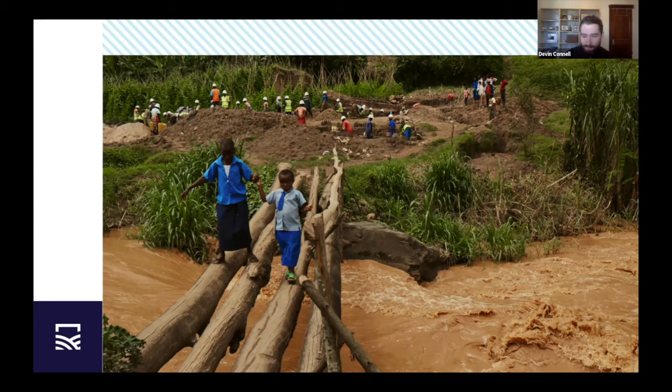day. Again, most of us now are starting to have a hard time having our kids walk a couple blocks to school on their own, for better or worse, in the US. So, you could only imagine what it's like for these families as they send their kids across these types of structures day in or day out. Or how about this is how you got to the market every day?

Now, for me, this photo really speaks to why we do what we do. If you look in closely here, this bridge is actually made out of barbed wire. The suspenders, if you can call them that, the main cables, if you can call them that, the ties on the decking, it's all made out of barbed wire. And this really speaks to the need communities see for these projects.

So this is an example of a community in Nicaragua that wasn't able to get the support on their own from local NGOs and the local government, and so actually took it into their own hands to build this bridge. We then worked with this community to replace this with one of our structures years later.

Or finally, take a look at this photo. Now, I don't know about you all, I've got a lot of good friends, but I don't think I'd be trusting them to hold each side of this rope as I climbed across. But unfortunately, this was the reality for this community in Ethiopia for decades.

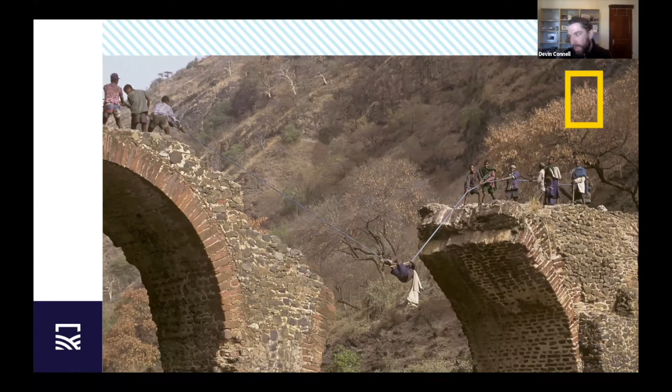This community actually destroyed this structure on their own during a war to keep out the opposing forces from entering their community, and had to live with that for several decades until this photo was put in National Geographic and is actually the founding story for our organization. Our founder saw this photo, said, hey, I think there's something we can do about it, and went and put this bridge in their place.

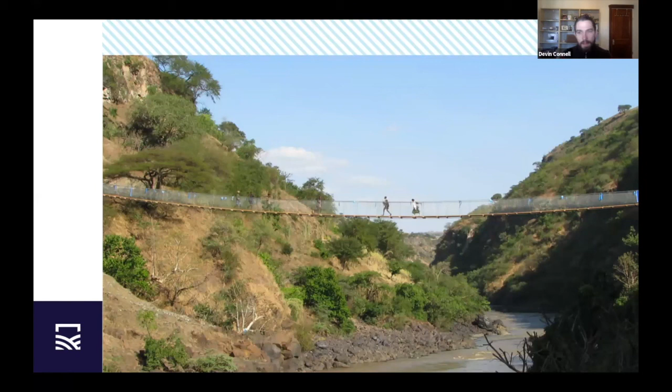Now, there's a reason why we didn't just stop at that bridge. We went from there to grow into what we are today, almost 20 years later. And this is a big part of that reason. The World Health Organization actually estimates that 1 out of every 7 people in the developing world lack safe transportation access to essential services. That's almost 1 billion people in the world who can't get to where they need to go on a daily basis due to infrastructure.

But why footbridges? Infrastructure is obviously a big thing. There's a lot of different factors at play there. Well, we focus on footbridges for a lot of reasons. A big one is 1 out of every 7, that roughly billion people around the world, the majority of them live in walking communities.

So if you go to one of our communities in rural Rwanda or Uganda or Panama or Nicaragua or really anywhere around the world, you'll see that there aren't roads in these communities, there aren't cars, there are footpaths, there are motorcycles, and there are cattle of different sorts. Their reality is a walking reality. And so the investment you put in for vehicle infrastructure oftentimes isn't realized in a reasonable enough time span compared to the much lower investment you can put in for pedestrian infrastructure.

A study that was actually done by the University of Notre Dame and Yale showed pretty remarkable results on our projects in Nicaragua. Really, one of the big ones here I want to point to is the 30% household income increase. It really blew us all out of the water. It was a pretty staggering impact that we didn't necessarily expect. And when we saw that, we said, we knew we were in the right direction before, but now we definitely

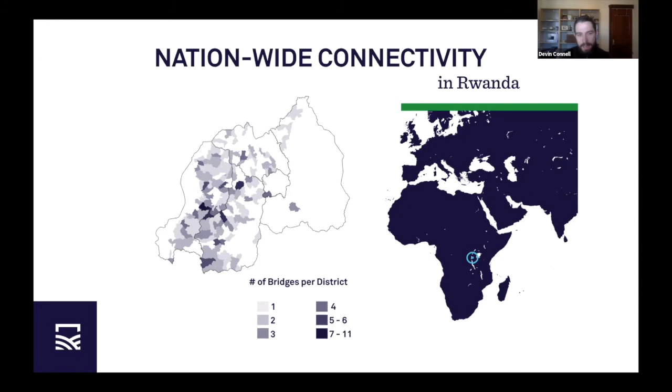Again, that was rapid fire, but I want to leave a lot of time for Nico to dive into design. So if you have any questions on the general background on our organization, why we do what we do, what we're doing in Rwanda, jot them down. If we don't have time at the end, you'll have my contact information and we can connect afterwards. Always happy to talk more about it.

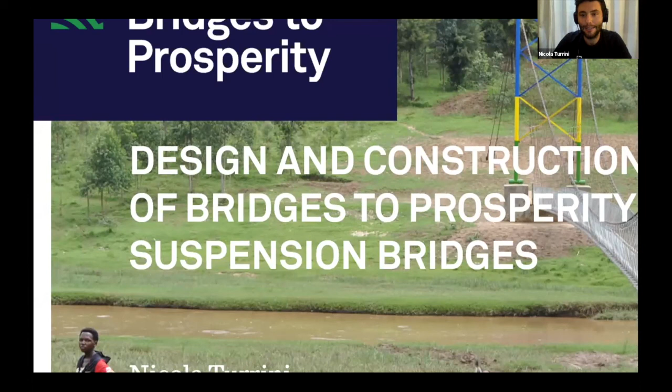I'm Nicola Turrini, and today I'm going to walk you through the main aspects of the design and construction of B2P suspension bridges, which is one of the 2 types of bridges that we do.

But let's start with a short and personal introduction, as Devin did. As you may suspect from my name, I grew up in Italy, in a beautiful town called Modena, where I completed my bachelor's degree in civil engineering and my master's in structural engineering. During my master's, I got a European scholarship called Erasmus, which gave me the chance to move to Madrid, Spain to work as an intern for an engineering firm. That was the start of a long 3 years in which I had a lot of fun, but also got a lot of experience in bridge design.

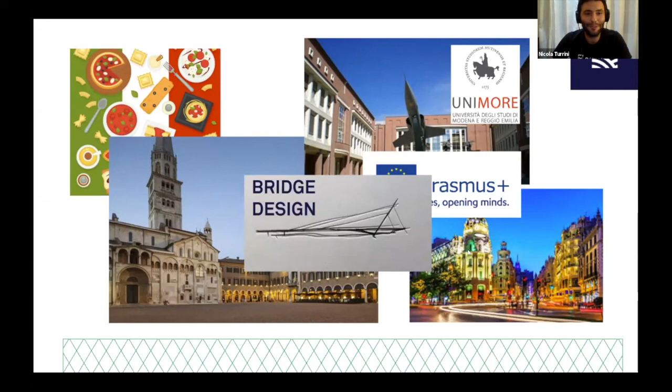In 2016, I took what seemed at the time like a crazy step of leaving my job in Spain and applying as a volunteer for Bridges to Prosperity, ending up being sent to Nicaragua, flying to the other side of the ocean for the first time, and having a lot of hands-on experience working on building cable bridges with my own hands for 9 life-changing months.

Thanks to my engineering background, I then made it into B2P. In 2018, I got the opportunity to move to Rwanda to help grow our local engineering capacity. Until the end of last year, 2020, I've been working for the Rwanda program as engineering manager, focusing on surveying, design, and quality control for all the bridges built in Rwanda. I now moved into a marketing role, bringing my technical experience with me, and that's why you see me here today in this webinar.

But what do we actually build in Bridges to Prosperity? We build cable bridges, structures characterized by light walkway systems that permit this kind of structure to span across wide valleys with no need for mid-span supports, and assure moderate dimensions also of the substructure as well.

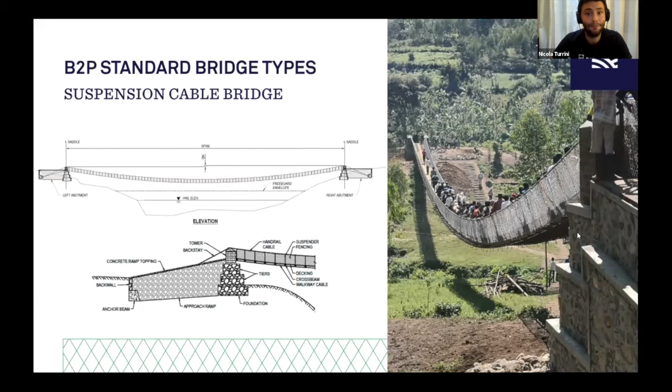We have two main standard bridge types. The first one is the suspended bridge, which is more of a hammock type, the kind of bridge that you find in movies like Indiana Jones.

The suspension bridge is the other type of bridge, which is more iconic, similar to the Golden Gate Bridge that all of you should know pretty well, as long as we are also in California right now, if I'm not wrong.

Here the main cables hang from taller towers, and the walkway is actually upward in order to improve the clearance below the bridge for flatter river profiles, like the one normally found in floodplains. Concrete pedestals are below the towers and transmit the load to the footings below, and an anchor, a deadman anchor type, is in the back, anchoring the main cables.

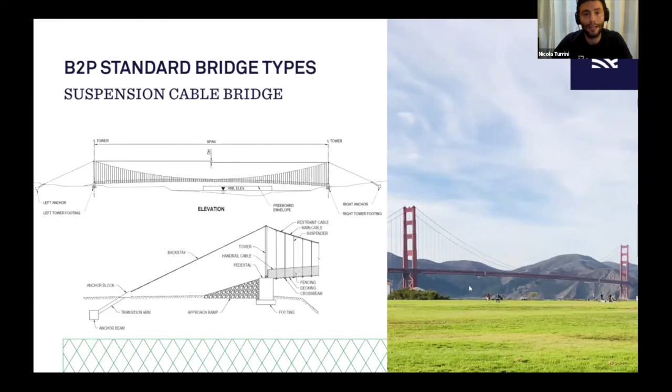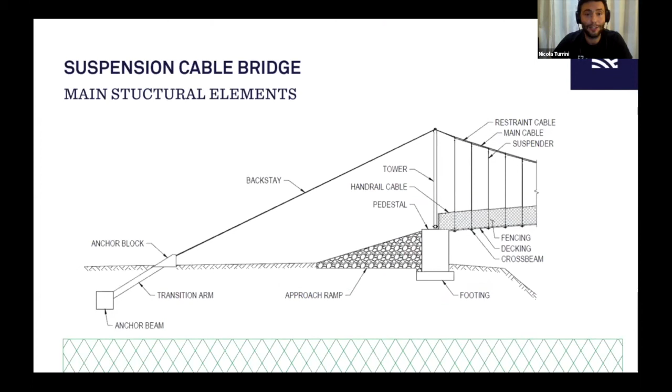This presentation is going to be especially about suspension bridges, so we're going to refer to this representation more than one time. I'm not going to stop right now, but we're going to go back to that.

We can start now with a brief overview of what it takes to pass from selecting a site to having a trail bridge built there, following our general steps.

In particular, the Rwanda program as an example, where a comprehensive assessment of need for pedestrian footbridges was undertaken in 2018 across the entire country.

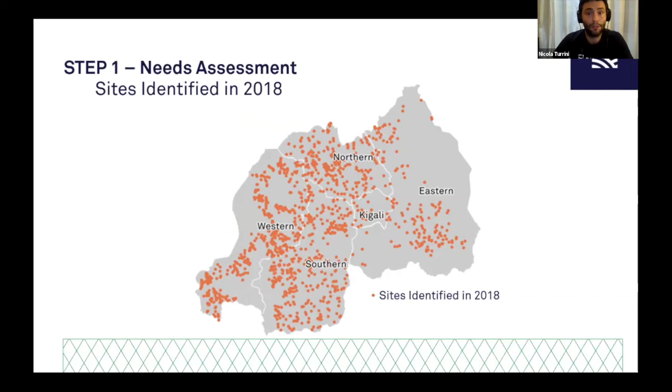Each assessment was then post-evaluated by the engineering department I was working in, in order to decide if each site was technically feasible or not for a B2P bridge, approving in this way around 300 sites out of almost 1,500 sites total.

Once the list of approved sites was ready, our research partners worked on a randomized order to be followed for the construction of our bridges in each district, basically a randomized controlled trial study. These were like Notre Dame and Yale, and I think also University of Colorado. Correct me if I'm wrong, Devin.

Each year, the same list is followed to decide which sites to survey in each district in order to design and build the bridge there.

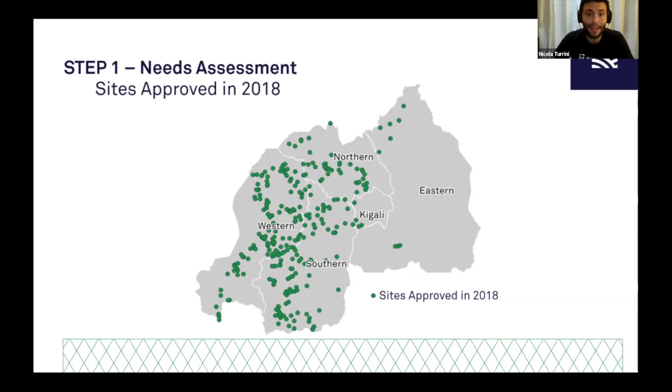Once the site survey visit is scheduled, our surveyor will get in touch with district and community representatives to plan the visit. Once on site, a bidimensional survey is carried out with a total station to define the profile of the riverbed along the line, which is selected by the surveyor, following criteria that we're going to see in the next slides.

Once we have the deliverables of the survey, which are topographic data, photos, videos, GPS coordinates, and geotech evaluation, all of this data is then used to design the bridge to be placed there or to reject the site.

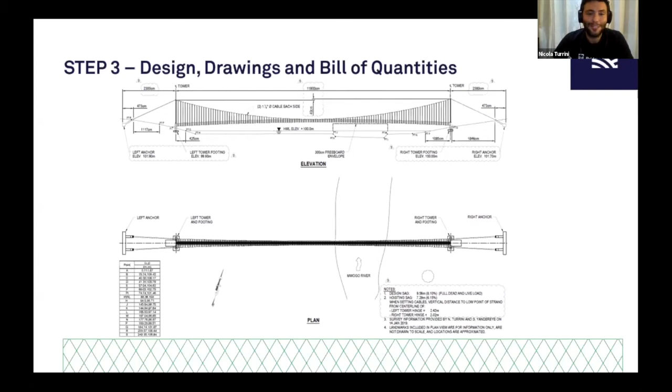A set of technical drawings and a bill of quantities, as in every engineering work, will be created based on the design. Once the drawings and the bill of quantities are ready and approved by the district, a bridge can be constructed with our construction team, and finally inaugurated and open to the public.

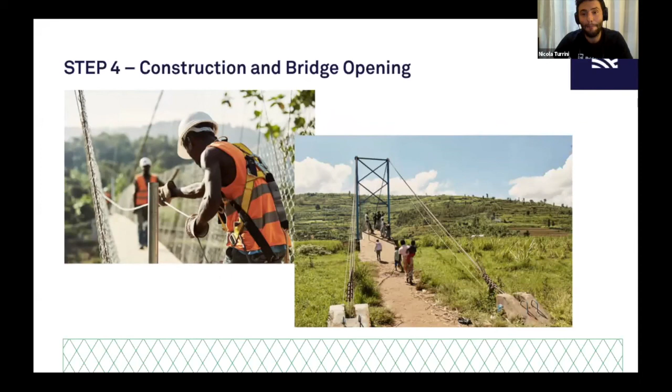Before diving into too much detail about main design parameters, let's start with some basic definitions that may not be completely familiar if you're not specifically working with cable bridge design.

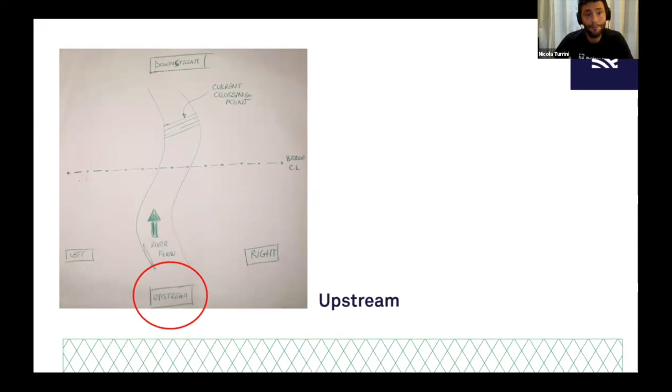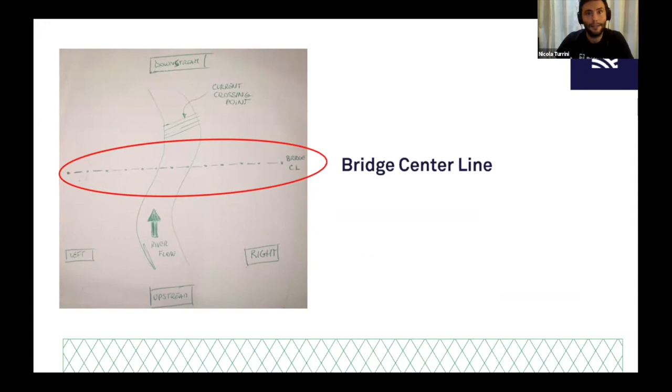Once the site is selected, the river flow direction will define the names of the different areas around the bridge, starting from the upstream, where the water comes from, and the downstream, where the water flows to. This defines the left side of the bridge and the right side of the bridge, and finally the center line, which is the imaginary line that goes along the initially taken survey and along which the bridge will be built.

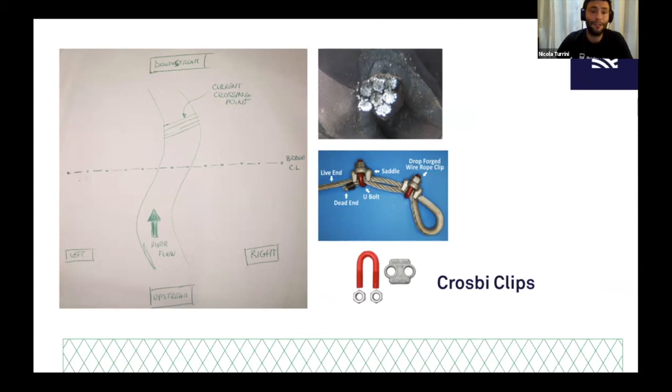Then I'm going to define the Crosby clips, which are devices composed of a saddle, a U-bolt, and 2 nuts, and they are made to clamp the wire cable to themselves, as you can see in the picture, and they're used like in the anchors of our bridges.

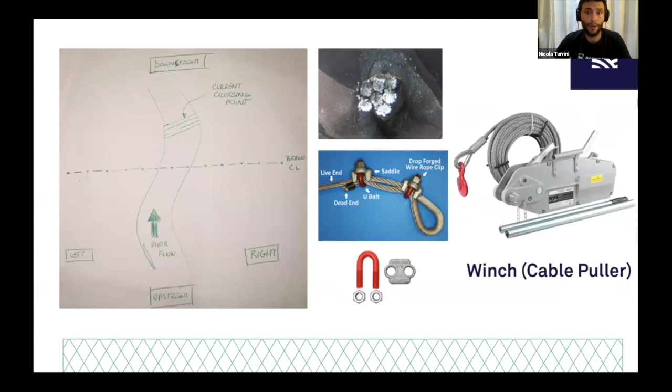And then we have a winch or cable puller, which is a manual pulling device used for operations like tower lifting or cable hoisting, as we're going to see.

And now, as promised, let's see the main parameters taken into account for the design of our bridges.

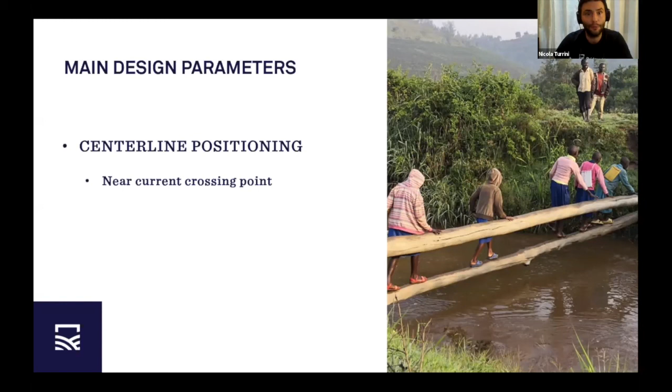Firstly, the bridge needs to be built near the current crossing point for social reasons. If you build it far from it, people could decide not to use it and keep crossing in the same old point and in the same old risky way, which you can see in the picture.

Then free and safe areas for both abutments and footings need to be available along the chosen center line. The quality of soil, of course, needs to be assessed and approved on both expected positions of the footings.

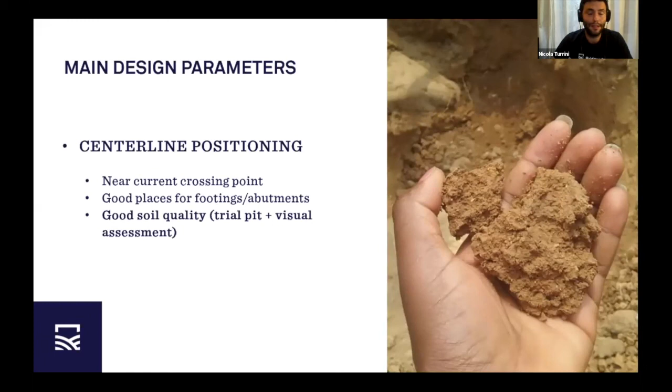And once located, possible position of the towers of the bridge, an adequate backstay distance needs to be surveyed in order to accommodate possible increase of design span in a second time.

The height differential between the 2 sides of the center line needs to be kept in a limited range in order to have a design that is possible and efficient.

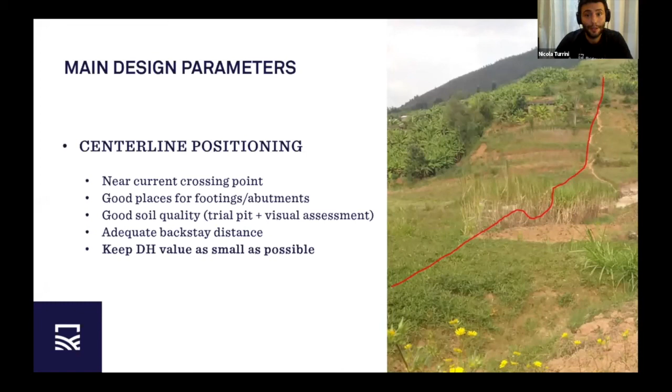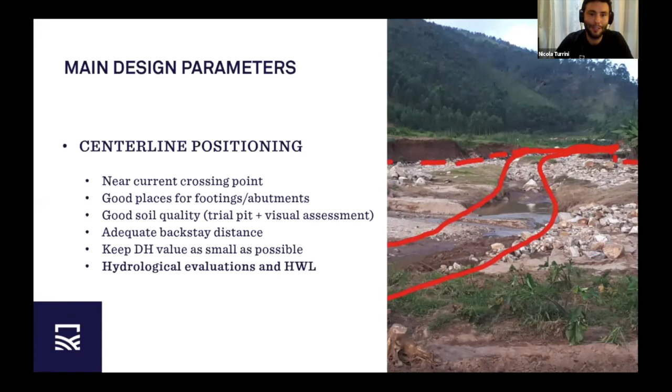And finally, we have the main question mark, which is the history of the river, the hydrological history of the river, which we can explore in the following points.

We can start with the status of primary and secondary banks, which is really indicative of the recent and past history of the river, giving us a first idea of how much setback is needed for the 2 footings.

Then the upstream river shape will also be really important to be studied. An initial 50-meter span proposal, which could be this one in this case, could have to become 100-meter plus, just because the upstream meander, you can see here, could be expected to push little by little with erosion across the center line in the years.

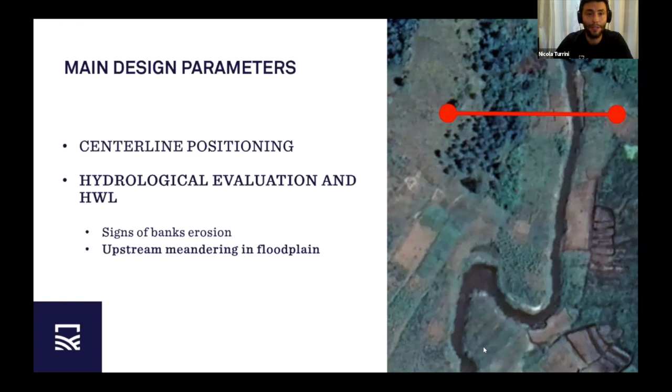We're not talking about something that happens overnight. We're talking about something that could happen in years, and we need to foresee that. Also, upstream confluences need to be avoided as much as possible, as those are areas in which the riverbed could move across the entire valley during individual flooding events.

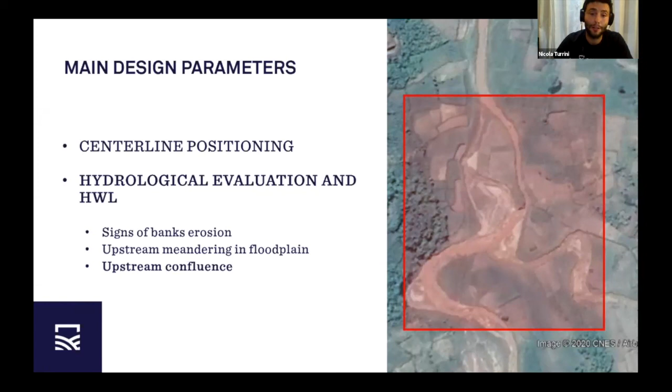And the high water level, it's probably the most important technical information to be collected from the community people, I would say, in particular from the elders of the communities, because it will geometrically define the needed height of our walkway.

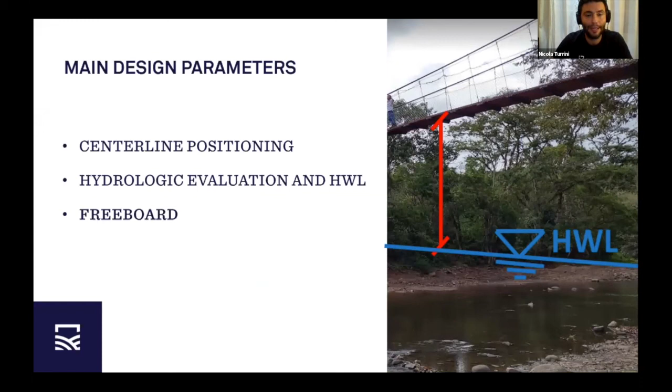Knowing the high water line, a freeboard value will then be defined to be respected by the design, and it goes between 2 and 3 meters generally for our designs.

And as said, all of these considerations will be taken into account in order to decide where to place the footings with respect to the banks of the river.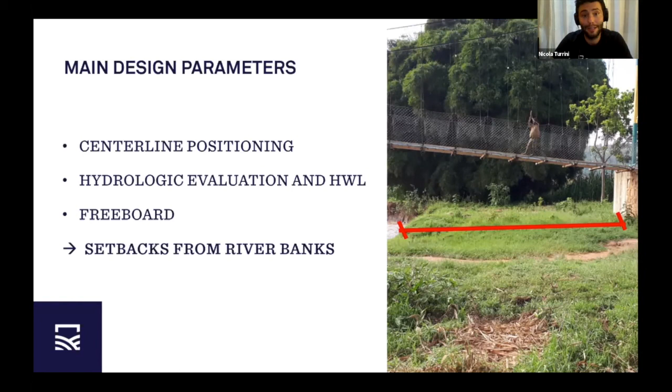Let's now start diving a little bit more into the bridge design, looking at the main structural elements, starting from our foundations, which are made by footings and pedestals.

The 2 concrete pedestals transmit the load coming from the top steel towers onto the footing, which is below them. And the footing obviously spreads it to the ground as a foundation.

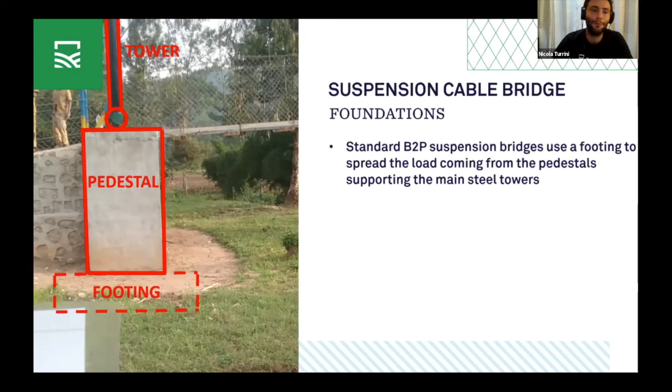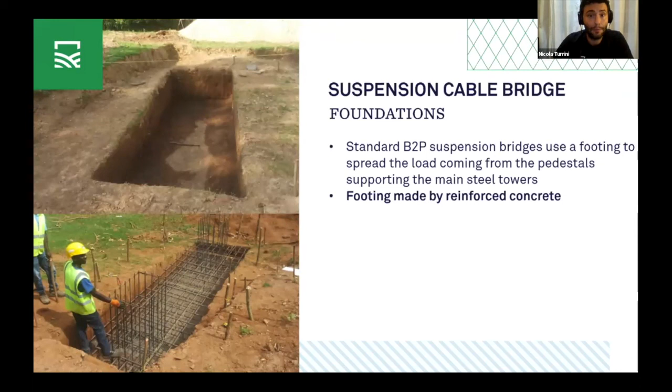The suspension footing is a reinforced structure generally designed at 1 meter depth, so really shallow. It does involve a really simple excavation, and the rebar cage is then assembled inside of the excavation.

And after a quick quality check on dimensions, orientation, and rebar position and number, the concrete is mixed and poured. All concrete designs for B2P bridges consider a compressive strength of 10 megapascals.

So basically like pizza dough, in order to account for the poor quality of the hand mixed concrete used on our site. And that gives you the idea of the safety factors that we involve in our designs.

Once the footing is casted and ready, pedestals are going to be built on top of it. Masonry or CMU perimeters are built around the assembled rebar cages, and eventually a first stage of concrete is poured using the same wall as formwork, as you can see in the pictures.

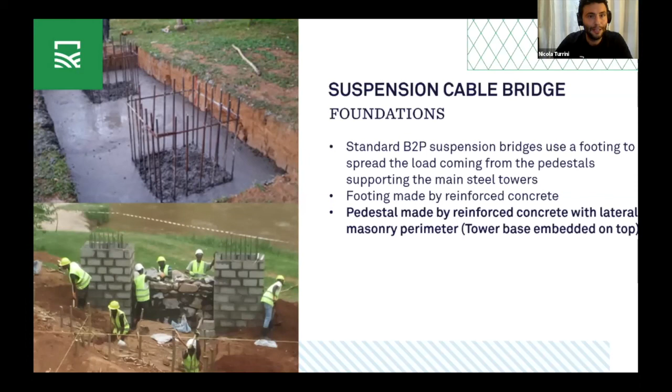Once the first concrete stage is finished, then on top we're going to place the base of the towers and an extra reinforcing cage, and then pour a second and final concrete layer.

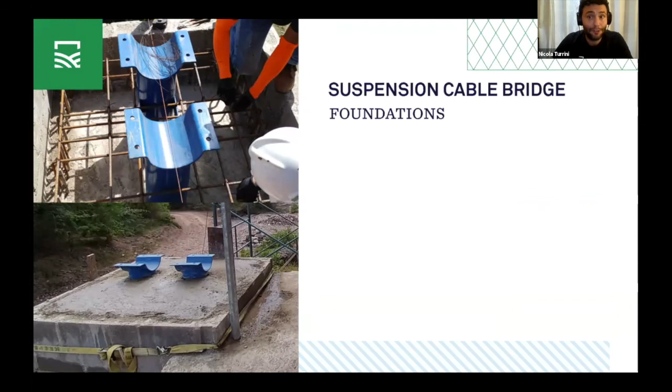One particularity of our suspension bridges is that the base of the steel towers is hinged. This means that the loads transmitted to these pedestals are going to be mainly of pure compression, and that the bearing pressure below the suspension bridge footings is checked and limited depending on the quality of the soil, of course, as every foundation. Flexural and shear capacity of the footings are also checked, and the pressure in particular is calculated using the equivalent width method, which some of you are probably familiar with here, if I'm not wrong.

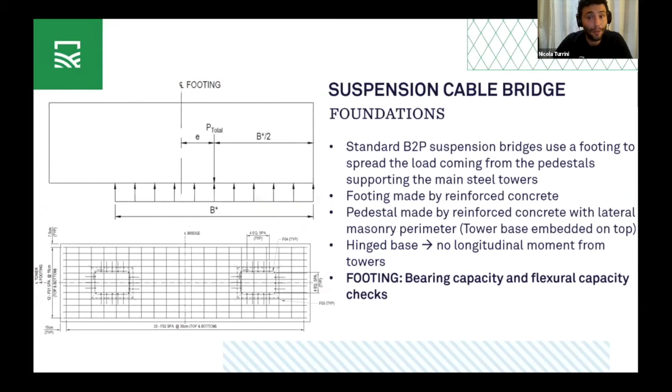As said, the dominant check for the pedestals is compression verification, as the bottom of the towers is hinged and not able to transmit longitudinal moment, and then a transversal moment from the top of the tower will be transmitted in terms of a couple of forces, one of traction and one of compression in the two pedestals.

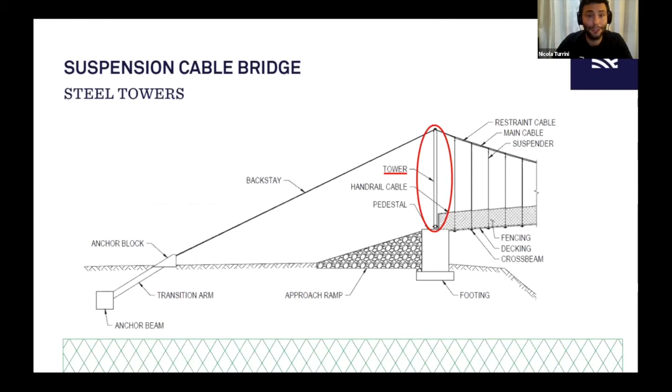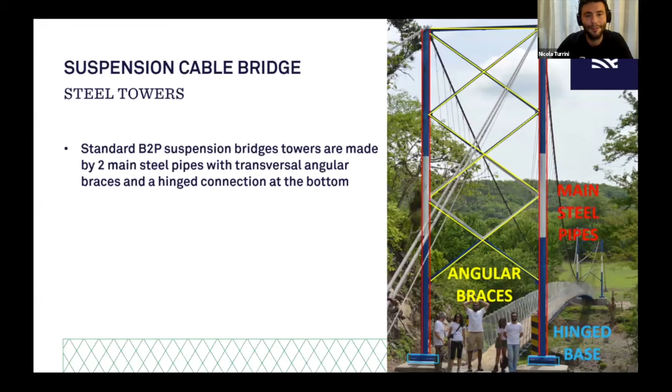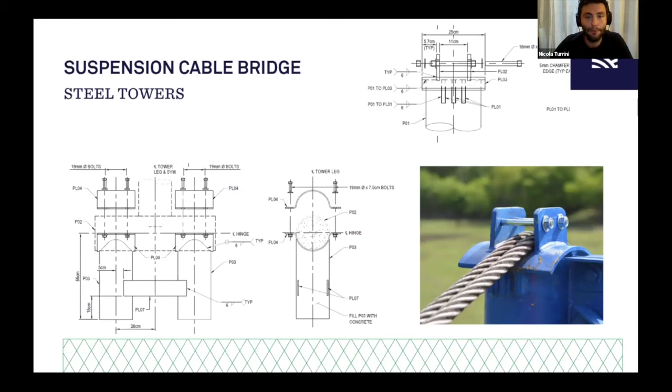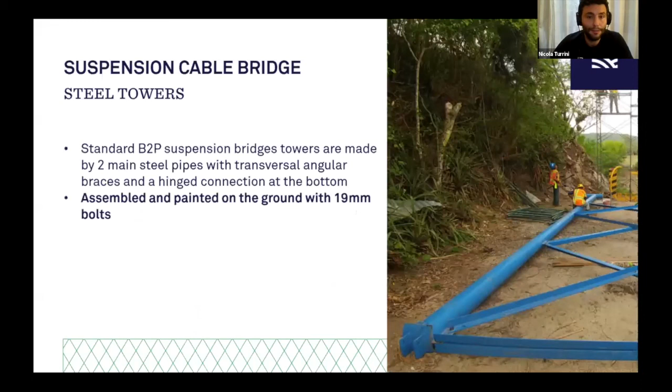The suspension steel towers are assembled on the ground, and after placing the base of the main pipes in position on the pedestal, you can start connecting the X braces with bolts and then paint the tower. As you can see here, we're in Nicaragua, so it's blue, white, blue as the Nicaraguan flag. Then a temporary scaffold is erected in front of the pedestals and secured with lateral guy cables. And there will be a pulley system on top, supported by a timber frame. A lifting cable is passed through the pulleys, secured to the towers with slings, and eventually connected to...

Are you guys able to hear me yet? Well, I just got the message that my connection is not good. Can someone confirm? Yeah, we can still hear you, Nico. Okay, good, fantastic.

So I was going to say that the lifting cable is passed through the pulleys, secured to the towers with slings, and eventually connected to a cable puller, the winch that we talked about, to the other side of the scaffolding. A good anchor point then needs to be found or created in order to connect the other side of the winch. This will generally be a concrete block cast on site, as you can see in the sketch.

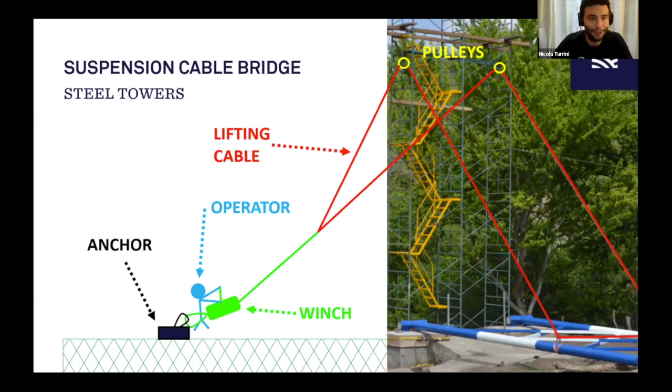The suspension steel tower lifting is one of the most dangerous steps for the construction of a B2P suspension bridge. A lot of things could go wrong, and all the danger zones and the escape routes indicated in the sketch need to be delimited and evacuated. And good communication needs to be assured between the team that is pulling at the winch and the team that is checking the tower lifting at the tower position.

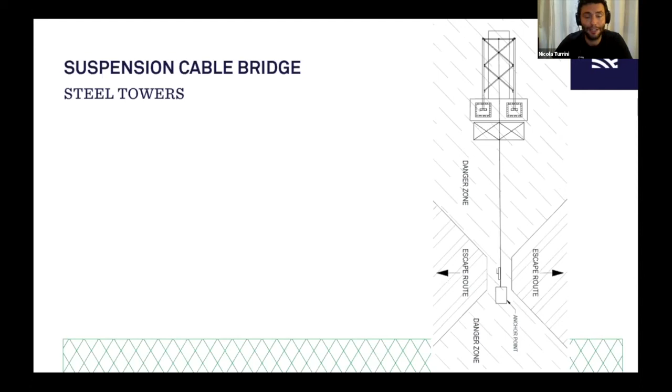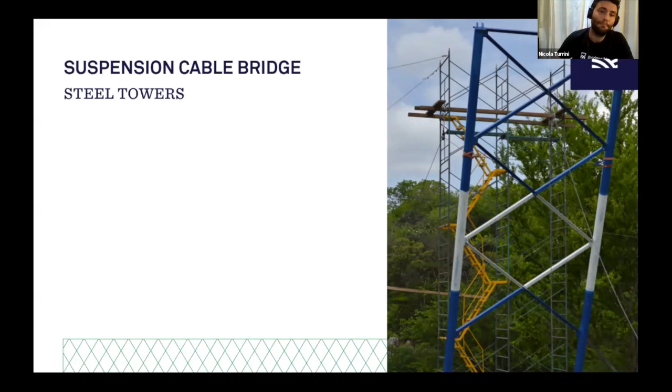And once everything is ready and the winch is set, then the hard work can start, and someone will start doing some good 15-20 minutes of rowing machine, little by little, lifting that heavy tower. And once it starts raising, it will be rotating around the hinge connection at the base, and it will hit the top timber structure, which will stop it with a precise cant, and the tower will then be secured with slings to the scaffold in order to be sure that it's not going to fall back. And finally, the bolts at the base of the tower will be secured as well. The inner part will be greased.

Sorry, there is just someone with the microphone open. If it can be muted, it would be great.

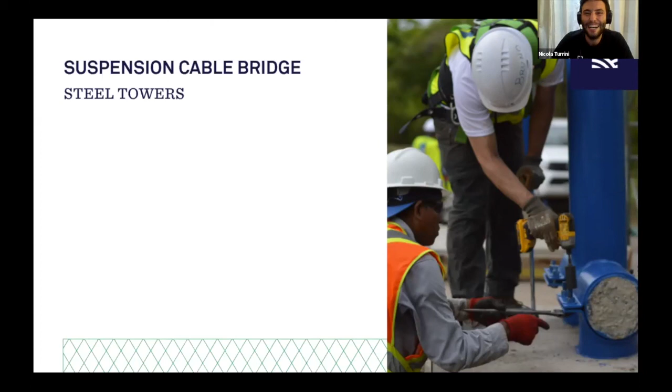Fantastic, thank you so much.

Structural analysis of each standard tower height has been run and parametrically studied in order to define optimal span ranges for them to work well both structurally and geometrically. So it's already been done at the beginning, and the calculations need to be rerun only if the specific tower that is used is going out of its optimal span range.

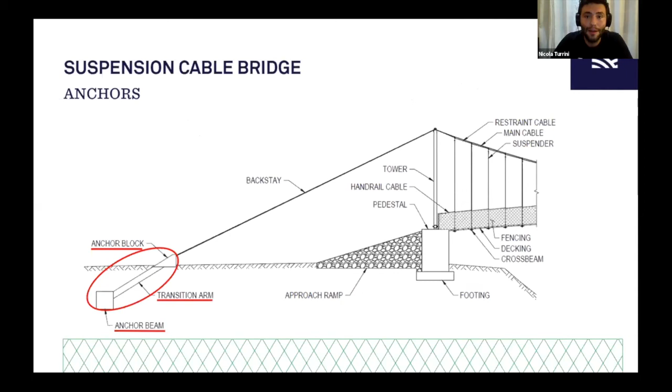And now let's pass to the peculiar anchor system of our suspension bridges that I mentioned. It's going to be an anchor beam, a dead man, we call it, underground with anchor blocks and transition arms. And as we're going to see, the main anchor beam in red is the main resistive body, and the transition arms in yellow transmit the load from the main cables to the anchor beam. And the anchor blocks in blue are the only part of the system out of the ground, with an embedded steel pipe as an anchor point for the main cables.

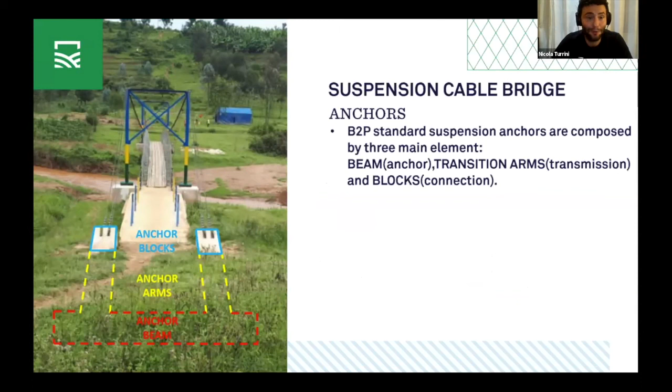The anchor beam is normally 3 to 4 meters deep in the ground, and that makes the excavation for suspension anchors generally massive. I say massive because we don't use excavators, we use hand excavations, as our general sites are very rural, very remote and difficult to access. This means that safety measures like grading the excavation with 1 meter steps, shoring, or building protective barriers with handrails around the excavation are always applied in B2P sites.

The anchor beam rebar cage is first assembled on the ground and then lowered to the bottom of the excavation with a rope system. Then the anchor arm cages are assembled and positioned, and finally also the anchor blocks once they are assembled too. Then beam, arms, and anchor blocks are cast in 3 different stages in order to make it easier for the construction team to deal with the formwork.

The most important reinforcing elements for this kind of anchor are for sure the longitudinal bars embedded in the transition arms, because those are the ones that transmit the load coming from the cable anchored to the pipe on top to the beam at the bottom, which is the main resistive body.

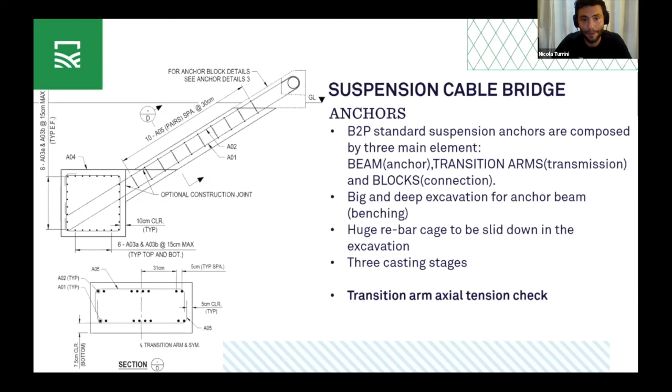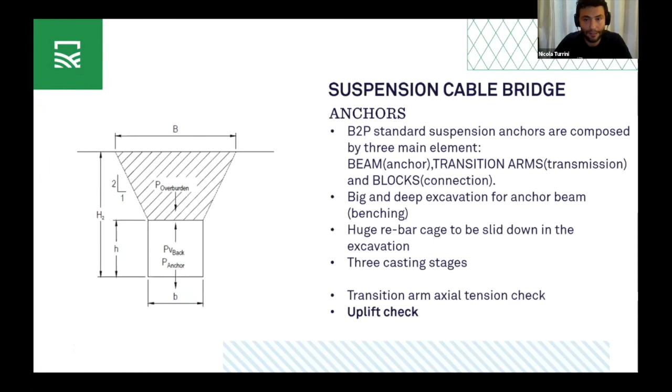And then there will be the uplift check of the anchor beam, which relies on the weight of the overburden soil on top of the beam, summed to the weight of the beam itself, contrasting the vertical component of the force coming from the main cables. This check is carried out in both dry and saturated conditions.

For the sliding verification, then, the beam needs to be able to resist the horizontal driving force transmitted by the main cables. Active and passive soil pressure need to be considered, respectively, as driving and resisting forces. The main resistance comes from the friction at the bottom of the anchor beam, which is proportional to the sum of the vertical forces acting on the beam. And this check is also carried out in both dry and saturated conditions.

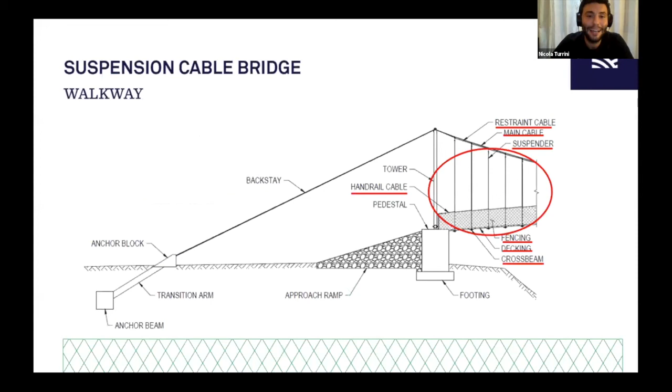And finally, we're getting close to the end, but we still have a big part, the walkway, generally the most interesting, which is made of these main elements I list now. The main cables in yellow are anchored to the anchor blocks and pass on top of the top saddles of the towers. Then the cross beams in blue are generally composed of a steel section and a timber nailer connected on top of it with screws.

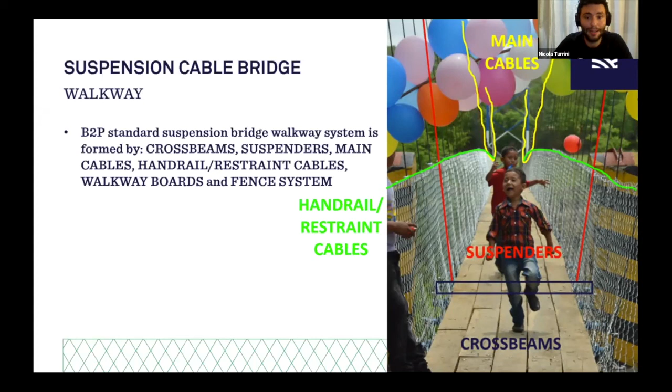The suspenders in red are made of 10 millimeter rebars, which connect the cross beams to the main cables. Then the restraint cables in green keep the suspenders distanced from each other and also partially function as a handrail cable, as you can see. The longitudinal timber boards are connected with screws on top of the nailers that top the cross beams. And finally, the fence is normally made of mesh fencing, as you can see in the picture.

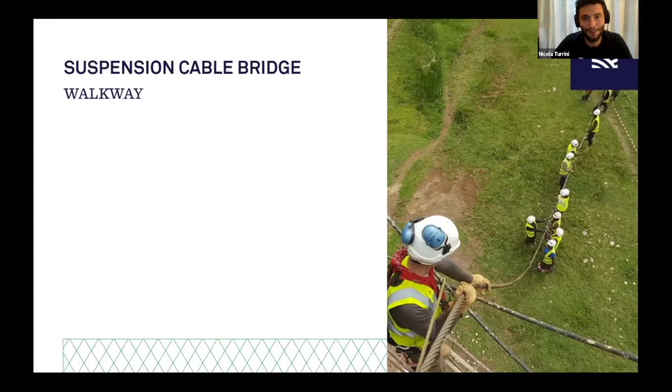The main cables will need to be transported by hand from one side of the river to the other. I was not kidding when I was talking about hand excavation. We do basically everything by hand. And workers will have to climb on the scaffold towers in front of the pedestals in order to lay the main cables on the towers' top saddles. When we talk about climbing scaffolds or working at height, we're always talking about using harnesses and lanyards or self-retractable devices. So we're always complying with OSHA standards during our construction works.

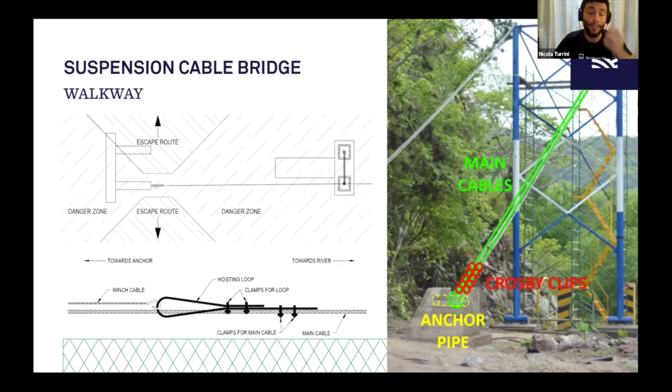Meanwhile, while we are pulling the cables, which generally takes 1 to 2 days, the suspenders are cut and bent following the measurements given by the suspender schedule, which comes with the construction settings. Because in this type of bridge every suspender is different from the other, as you may imagine. While in the suspended bridge, which is a hammock type, the walkway and the cables have the same shape, here they have a different shape, so that's why.

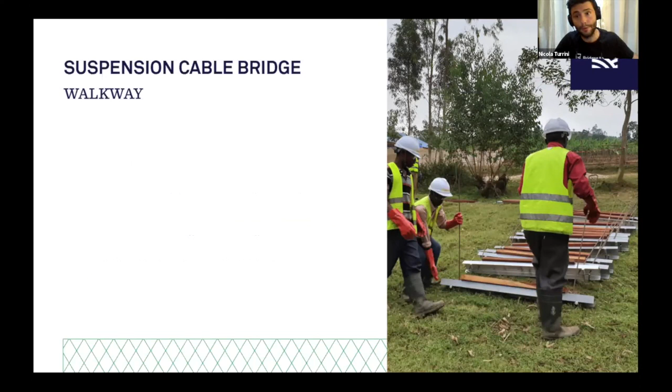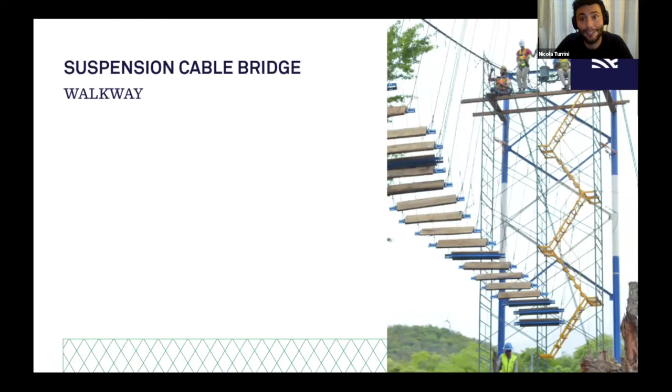The suspenders are then assembled, and the crossbeams are laid near the tower in order to be lifted and launched. A group of workers will be set on top of the front of the scaffold of the tower, waiting for a second group of workers to lift the suspenders in front of them with a system of ropes. Each suspender will be looped from the top team around the main cables and connected to the marks on the restrained cables with clips, as you can see here. Then the main loop will be closed with another clip.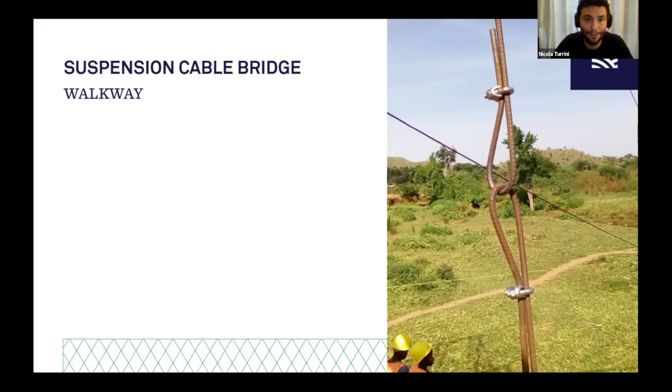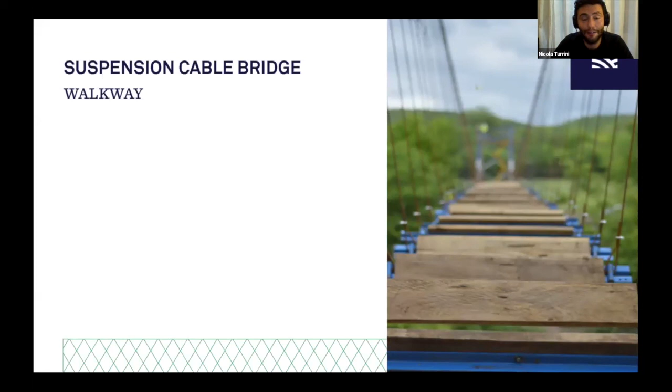When we have a suspender that needs to be too long and they need to be overlapped, we have this kind of connection in between the two suspenders. Finally, on both sides, we will have launched the suspenders, and we will see for the first time the profile of the walkway getting in shape. That's the time in which we want to start gathering longitudinal timber boards near both towers in order to have two construction teams from both sides starting connecting dots, basically.

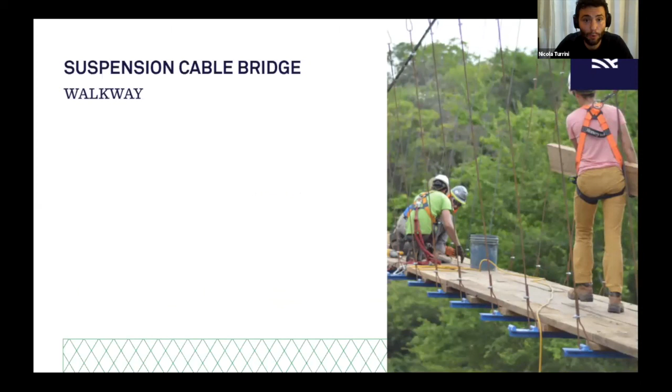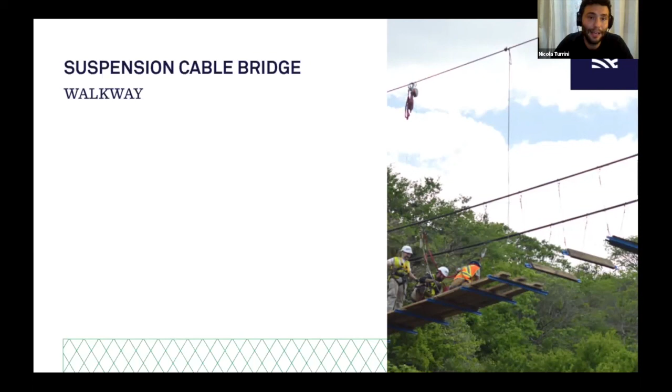And here we are with the front team connecting the boards, and a third person generally feeding them boards and material. This happens on both sides simultaneously. You can see that for this kind of working at height, we need a safety line on top on which to connect self-retractable lines. The safety line is basically the same kind of main cable with steel wires that passes on top of the top brace of the main towers with a padding in between, to make sure the friction doesn't ruin the cable or the tower.

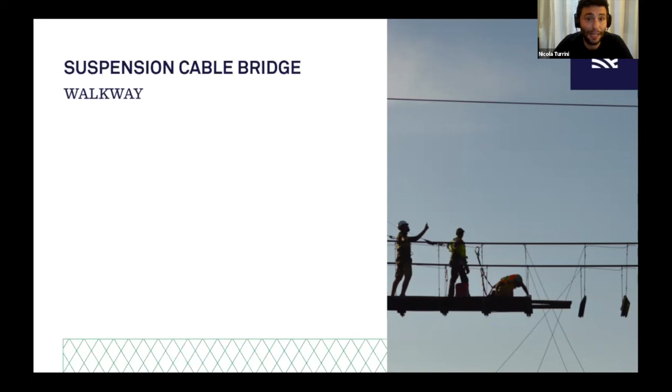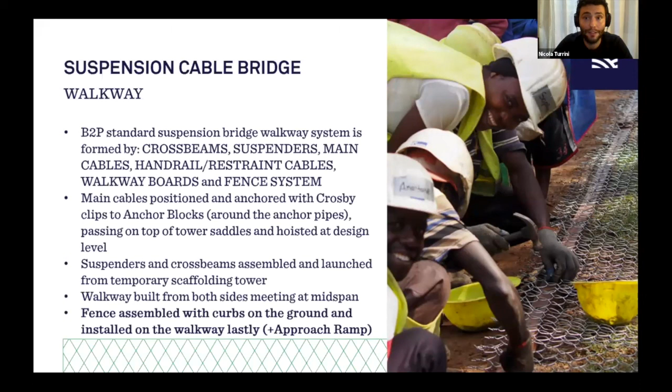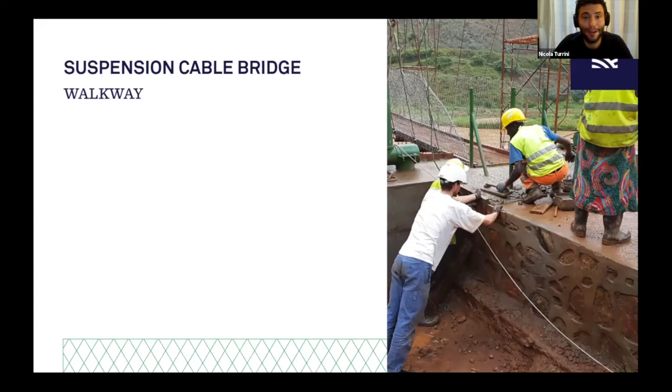At mid-span, the cables will be low enough for workers to connect directly to them and not to the safety line if they want. Once the two construction groups meet at mid-span, the walkway surface is finalized, and it's time to install the fence, which is assembled to the lateral timber curb on the ground and then transported on site, on the walkway, and the lateral curb will be screwed into the top timber of the walkway, obtaining a detail that looks like this or like this. The last step is to cast an approach slab to level the ramp with the walkway and to avoid tripping hazards. And here is the same detail from above.

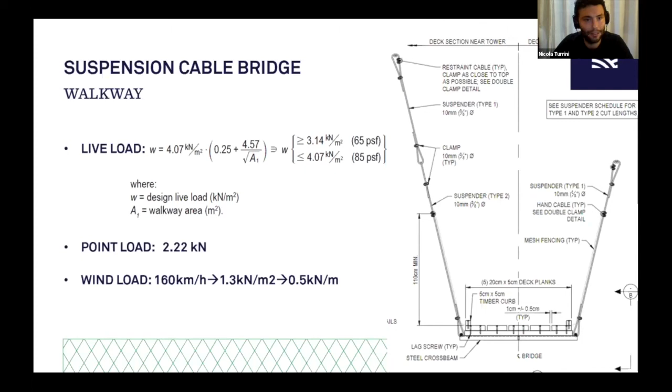This walkway system is designed to withstand the AASHTO distributed live load described here, which goes from around 3 kilonewton to around 4 kilonewton, depending on the total walkway area. Every single structural element will also need to withstand a local concentrated load of 2.22 kilonewton, also coming from AASHTO, and the wind load related to a wind speed of 160 kilometers per hour, which is more or less 100 miles per hour, is considered acting on the entire structure, which is pretty high.

The analysis behind the cable design starts with the determination of the horizontal component, pH, which is constant along the bridge, from which every needed component can be calculated simply using trigonometry. The safety factor considered for the main cables is 3.0, the minimum safety factor, let's say. The backstay forces rely on horizontal equilibrium at the top of the tower, because the tower is able to rotate. And the goal sag level for live loads is normally the span divided by 11.

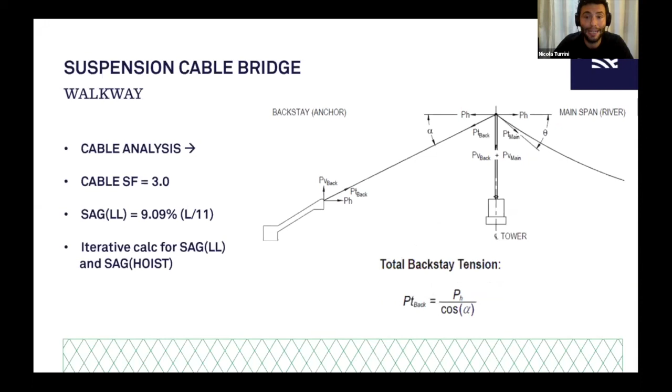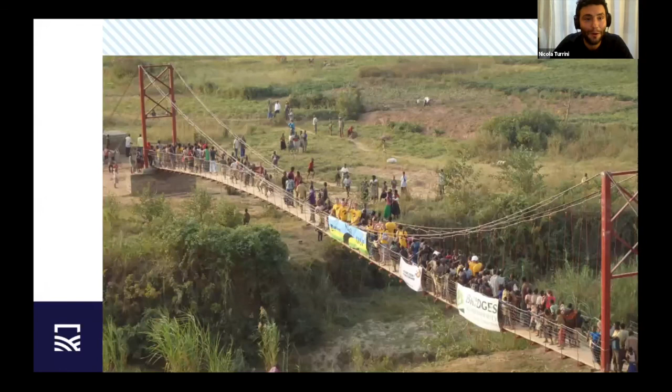And here are some examples of what a suspension bridge looks like on inauguration day, but also on a normal day. It always looks good, generally. It's such a beautiful type of structure, and it's really scenic in these kinds of valleys.

And finally, new developments. Let's talk about steel decking. Timber decking has always been a challenging element of our bridges, easily sourced by local communities, but with a really short life cycle, 4 to 7 years if we're lucky.

Increasing in that way the maintenance costs over the years. For this reason, we have been piloting a new grating deck design in our Rwanda program throughout 2020. The system is composed of hot dip galvanized grating panels with bottom plates to be fixed with bolts to the steel crossbeams. Lateral concrete curbs are then fixed with bent rebars to the grating panels in order to guarantee adequate mass to the system, which would be too light if not.

These grating panels are sourced outside of Rwanda, since in Rwanda there's still no possibility of hot dip galvanization, which was the solution that we went for, and there isn't a real market for it.

Another remark is about COVID and safety on site. We have always operated with a safety first mentality, providing full PPE protections to all of our workers. But as you all know, COVID brought this topic to a whole different level. But COVID found us prepared. We quickly updated our safety protocols with COVID preventive measures in line with the national Rwanda requirements.

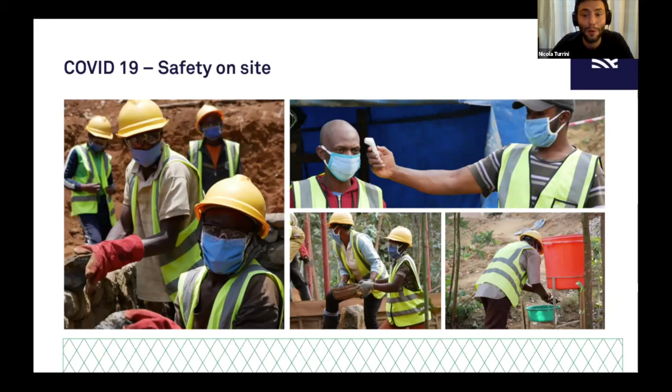So there are lots of questions here, and I'm going to be selecting a few, keeping the time restraint. The first question is interesting. Do you have any suggestions for internship or volunteer work for engineering students? Someone is looking for a volunteership or internship. Who should they contact? Devin. Yeah, great question. If you're interested in volunteering, definitely reach out to me, send me an email, and I can give you some more information.

With the current climate and our restrictions and operations from the past year, we actually don't have a lot available at the moment, but that fluctuates on a timely basis. We also partner with an organization that works with university groups specifically. It used to be part of our organization, and then it separated out to focus specifically on university groups. So much like EWB university groups, they have bridge chapter university groups, and I can introduce you to them as well. So if you're a university student and interested in getting involved in this type of work, feel free to send me an email.